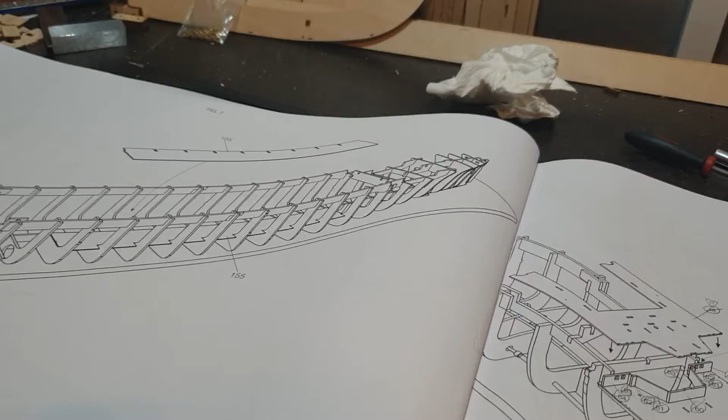Hi people, part 2 of the Titanic build. So we're up to here at the minute.

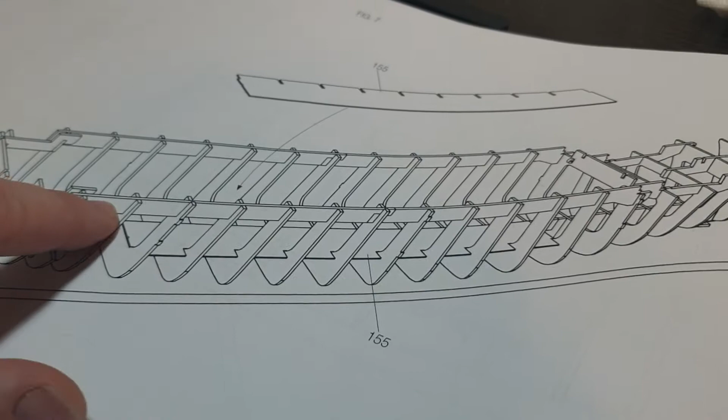As you can see on the diagram, these sit on top of, I still don't know what they're called, sorry, them things anyway, things that make the shape of the boat. So I'm not going to actually stick them in with glue, I'm going to try pinning them.

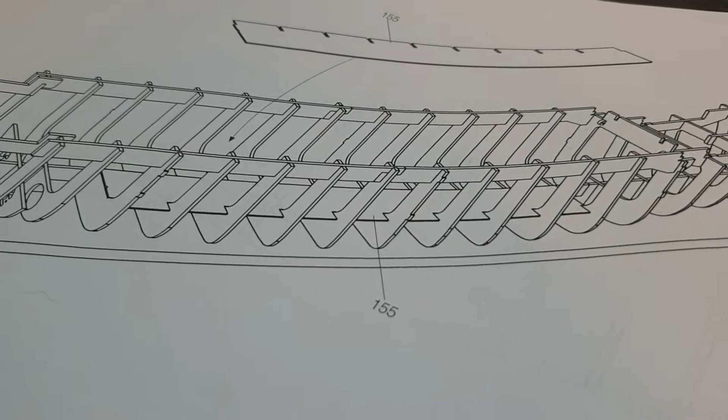I think they're just basically to try and hold the boat straight at this point, and I'm going to try and pin them in, because when I've been looking at the steam engines I want to put inside, they're actually about 6 inches, which is 15 centimeters, well, just a bit more than that.

One second, I'll just bring in another ruler to help. So from the top of the keel to the top of where the cross members are, we are actually only, if I try and get that right, 4 inches actually.

4 inches and 3/4. I'm looking at 6, so I'm actually quite a lot out. Sorry for the bad camera, I'm trying to do it by holding it.

I'm actually 1 1/4 inches out, but if we don't do it from the top of the keel, and we can get away with putting it in here somewhere, like so. If we bring it to the bottom, just for the sake of it, we're actually 2 inches below there, so then we actually get enough room for 6 inch and 3/4, which is perfect.

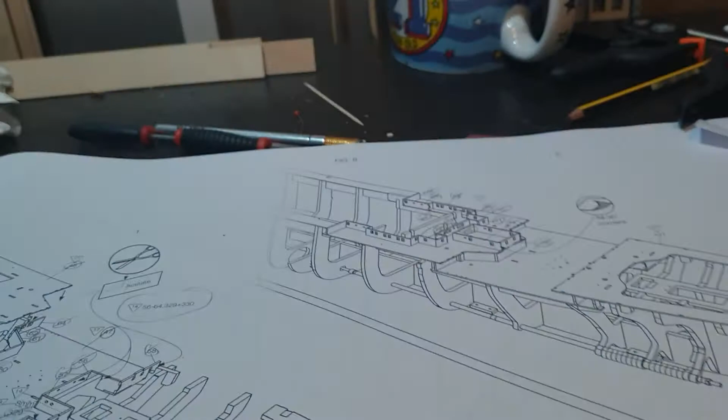And then after that, so I did buy myself a tripod, which is no use whatsoever because you can't see, because I'm using my phone, I can't actually see what you guys are looking at, so I can imagine it'll be even worse of a video.

So after we've pinned that in, we're going to move on to putting parts of the deck in. Deck, some windows and frames, another deck, more windows and frames here. Hang on.

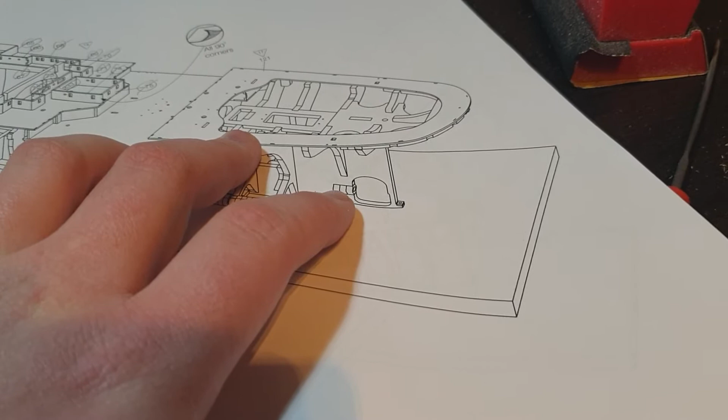The bow's the front, innit, so that's the stern. Deck on the stern, is it? I don't know, correct me if I'm wrong. A bit of a deck on there.

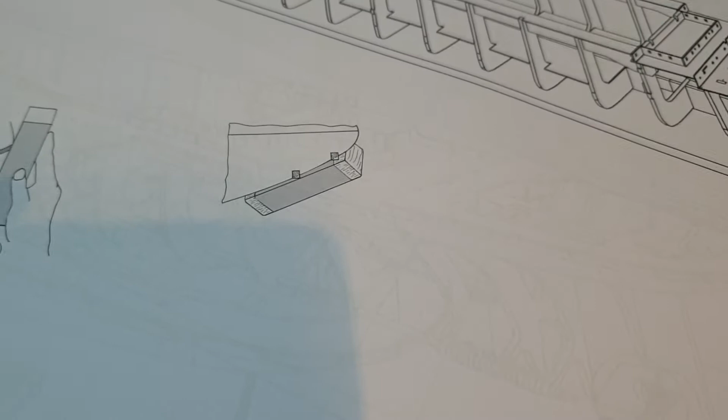And then I'm hoping to get figures 9 and 10 done, and then possibly start sanding, as it's telling me here. But I'm not sure how far I'll get along, because there is a lot of cutting out and sanding, as you can see here, there's a lot of small pieces.

They're not that small, but they're small. So I'll sand along the front just to make them nice and smooth. And then you have to sand these tabs off here, make them nice and smooth. There's also some inside there which you have to get nice and smooth, so whatever fits in there fits nice and snug.

And I did see, here we go, so here it says all 90-degree corners, it says it here. All 90-degree corners, basically sand them round. So they're not actually 90 degree, they're actually rounded corners.

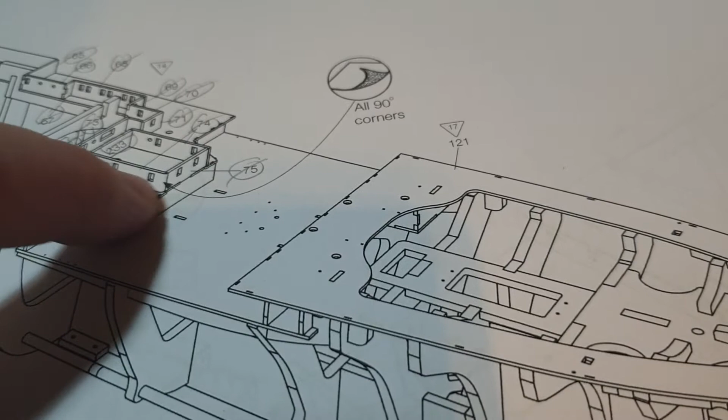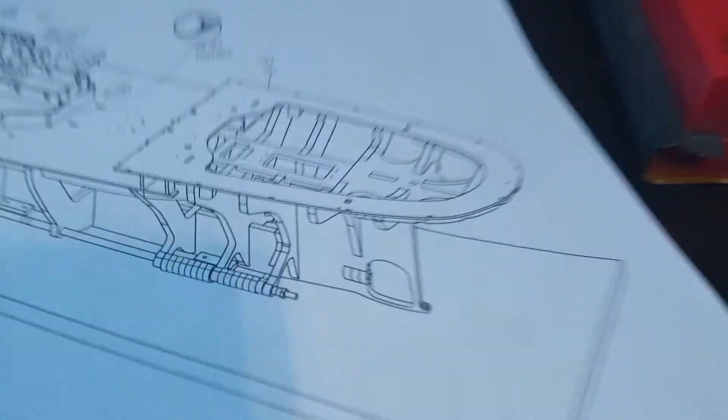Now on my first Billing Boats, which is that one there, I didn't see that corner instruction, and I didn't actually do it, but it still turned out all right. It sails, it's a bit of a beast that. It's got 2 engines on the back, 2 propellers, it's got a thruster at the front. It's turned out okay from a distance.

I also know a lot of you probably know how these pieces are cut out, and how to get all these inner pieces out, and the fact that you have to sand them all, but I'm just going to do a little, maybe 10-15 minutes on this of how to get it out, hopefully less, but how to get it out, what my favourite blade is to do it, how to trim these out, just so anyone who's thinking of starting a boat knows full well how much work is into getting these actual things out of here before you can actually do anything else.